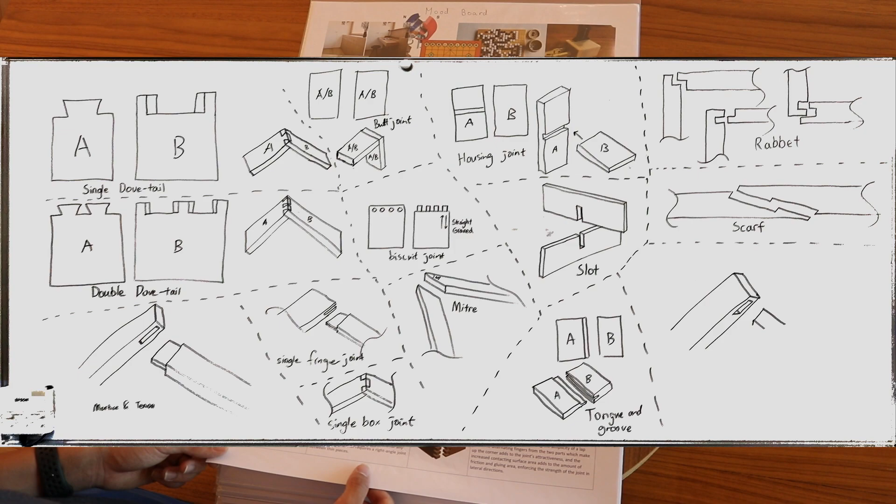With the research I made a plan, and then I made a mood board, and I started thinking about all sorts of things. I did a page of research on wood, different types of wood joints. From the start, I already had the idea of using spherical balls in mind, so I did a small test on the school's CNC machine and milled a few spherical holes on a piece of wood and tested how well the metal balls would fit.

I searched up suppliers for these metal balls, and then I did some materials research with different types of wood to see which ones would work well. I had an interview with my client, my friend.

We talked a bit, we talked about what specifications he has, and then we visited our maths classroom, since our maths teacher is actually also a Go player and has all sorts of different types of game boards, chess boards as well. I then looked at all sorts of existing products online.

There are many different types of Go boards. There are the simple ones, like the one I showed earlier, but the most professional ones are actually a full block of wood. This is a completely solid block of wood, and the grids are marked on top of it, so you can imagine how expensive this would be. But most are just the simple flat type with 2 bowls of pieces.

I then came up with a list of specifications for what the final product must satisfy. For example, I said all the joints must be hidden. It must have a 19-piece by 19-piece layout. I set limits on the cost of the materials, and I set limits on the maximum size of the final product.

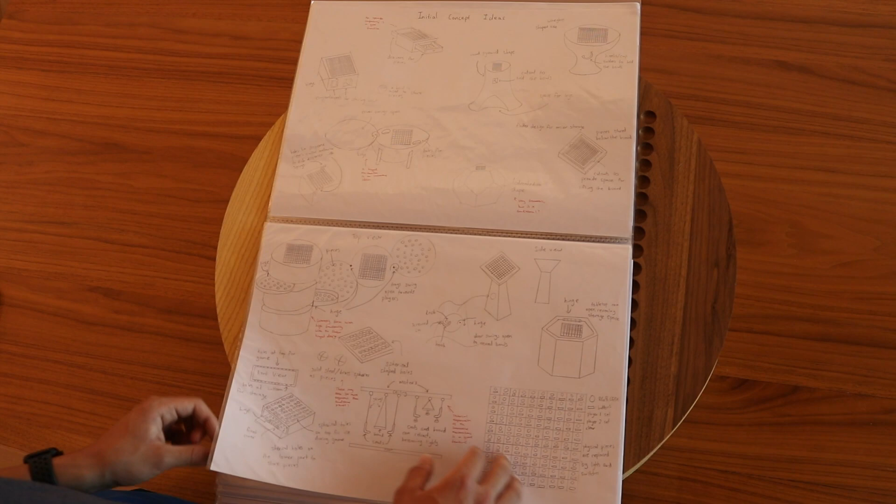And then now, with all of these specifications in mind, there's a whole process that we went through for generating different ideas. First, we just did rough sketches of all sorts of crazy ideas. There's no limit on how crazy you can be. You see, I even thought about having a board and chairs suspend from the ceiling that act as lights once they retract. I thought about a dodecahedron shape Go board, all sorts of different crazy ideas, just to start off with. And then we chose 4 out of these roughly 16 ideas and extended them further in greater detail.

Here's the first one. It's kind of traditional with a drawer and just the grid at the top. We dimensioned them in detail and did some design drawings. And I also 3D printed a very small model to see what it would look like in my hand.

Here's the next one, and it's actually the very initial idea of what evolved to become this final form. I initially thought to have different circles stacked on top of each other like this, but I could already tell that would be very unstable. And later on I do address that and develop the idea into what it is finally. I did all sorts of calculations and made a small CNC model just to test out the rough form.

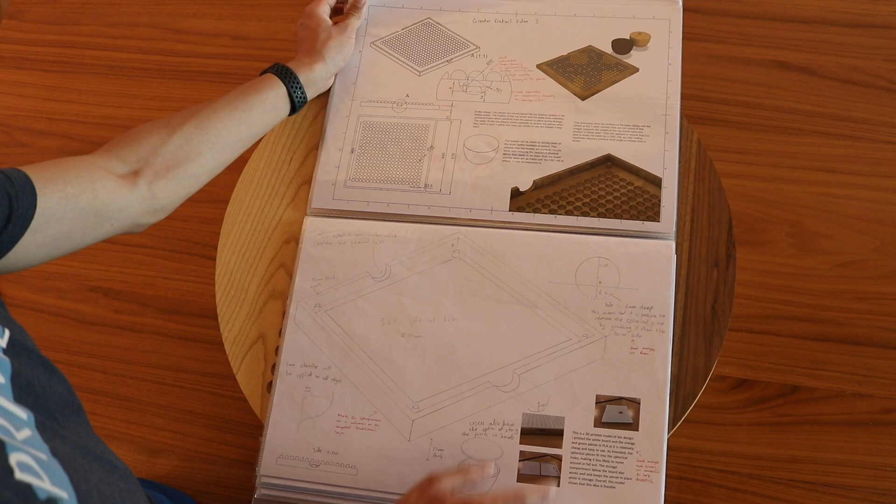My third idea was just a completely flat board. Below is the storage compartment, and a completely separate board would go on top of that to act as the playing board. And I also had pencil drawings down here.

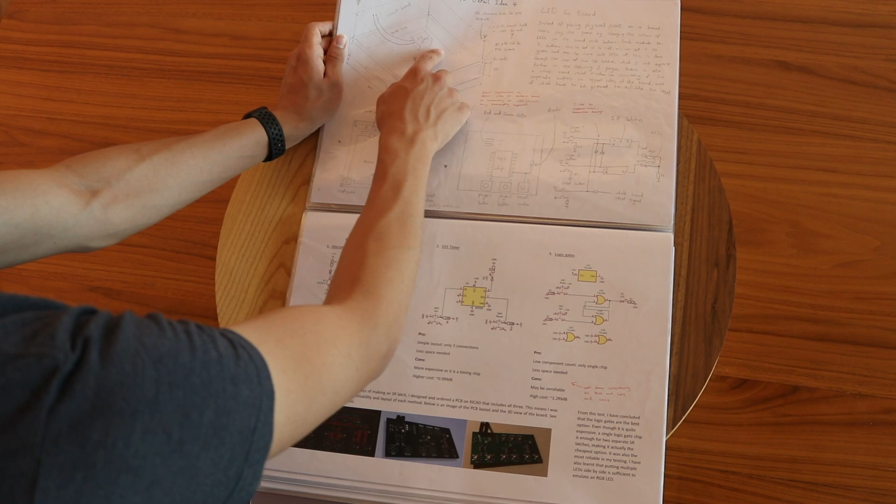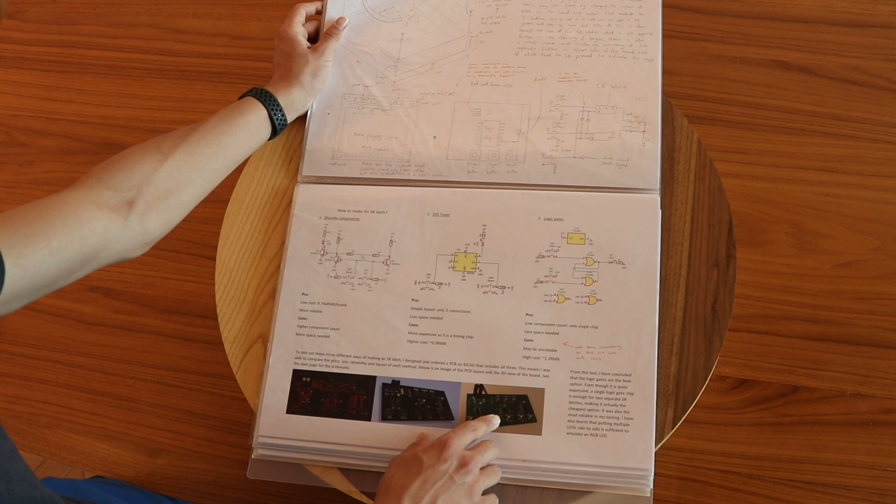And the last one is the most different. This is my electronics knowledge leaking through. This idea was that the top would be a circuit board, and instead of having physical pieces, it would be an array of LEDs. And each grid would have 2 buttons, and depending on which player is taking that grid, it would either light up as red or green. I thought about what circuits could make this possible, and I even made a physical prototype of different ways of achieving this mechanism. And here's a circuit of different ways of making an SR latch.

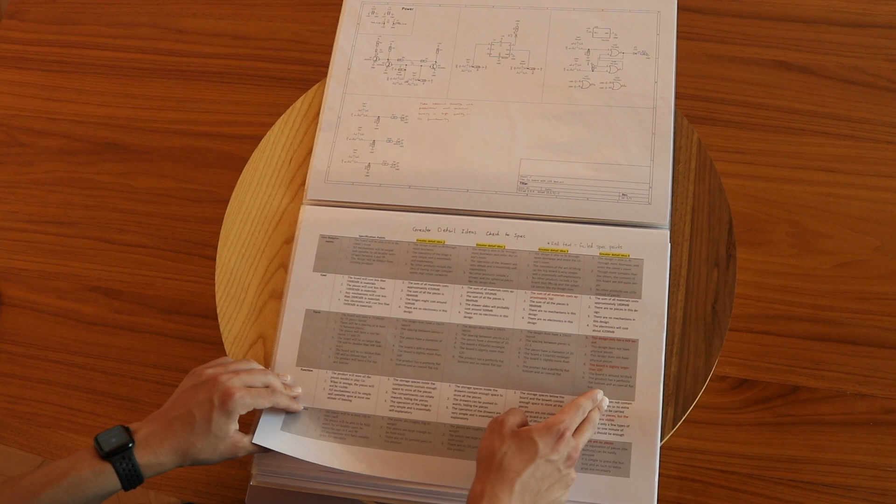Now I took the 4 greater detail ideas and compared them back to the specification from earlier. And I thought about how each one fits or doesn't fit the specification and marked the places where it doesn't fit in red text. And as you can imagine, since the 4th electronics one is so different from what I initially had in mind, it fails a lot of the specification points, and it's not something that I pursued in the end. And so I decided to go with the first 2 greater detail ideas.

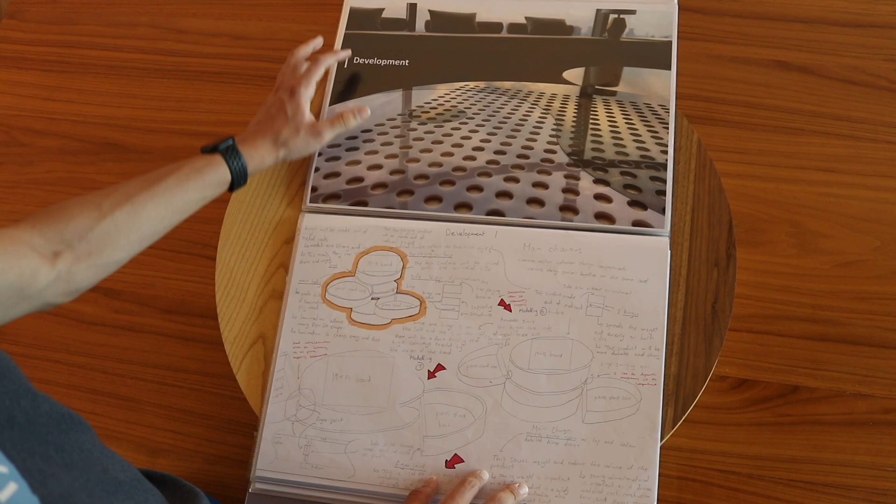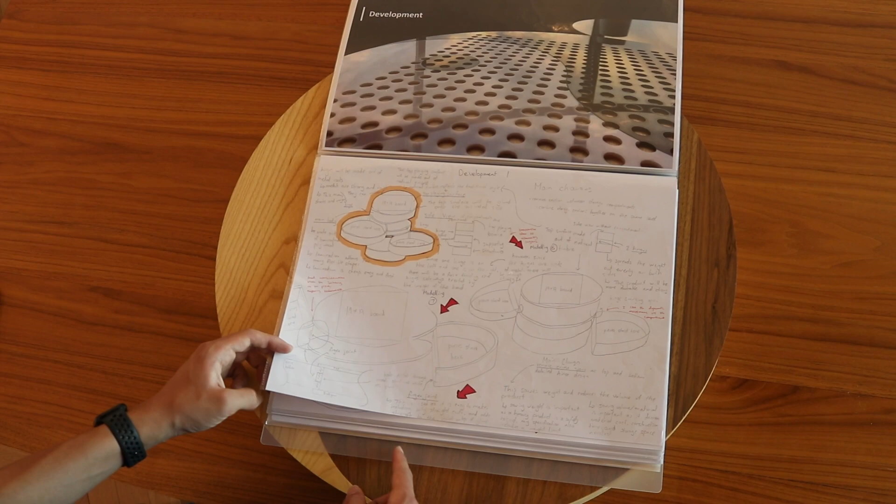And next is the process called development, where you take the idea and make a small change to it, and draw it, and then make a small change to it, and then draw it again, and making all sorts of comments during the process. So you can see how I removed the unnecessary middle section and made it semicircles to simplify. And then I removed even more waste, and I decided to change from semicircles to the Yin Yang shape, since Go is an Asian game and the Yin Yang shape is also very much related to that.

I had all sorts of ideas on how all the pieces were going to fit together and how I was going to use the rods to hold everything together. And you can see I initially had the idea of having the 2 compartments pivot through the center of the circle, and that would be pivoting through the center here. But in the final product, what I actually have is the 2 compartments pivoting out from the tail, roughly here. And you can see later here in the development process, I made that change.

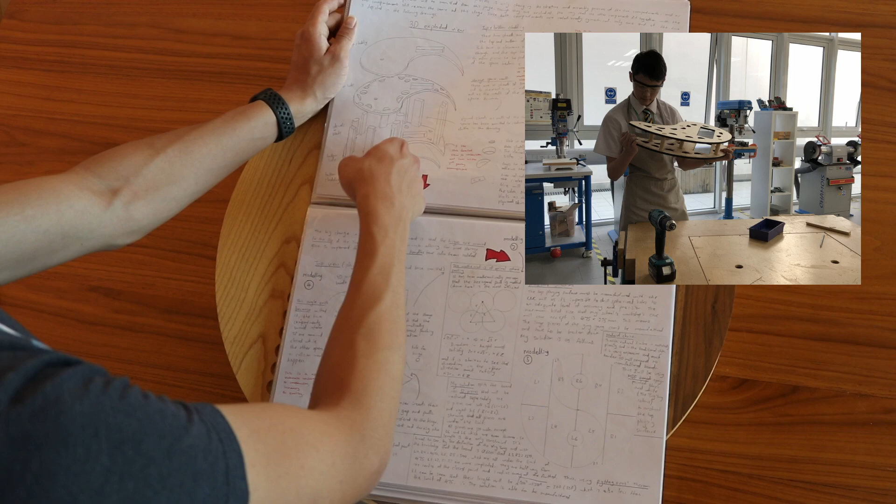Here's also one very important part. This is what the internals of the 2 storage compartments actually look like. There's a flat piece of plywood at the top, a flat piece of plywood at the bottom, and then vertical rods holding these together. So the outer skin of the storage compartment is actually a very thin veneer. You can kind of hear it's quite hollow.

I also did the calculations for how the balls would fit together in the storage compartment. I designed the 3D printed handle here. And then I described some of the physical models I made during the development process. That was the first design.

I also repeated the whole development process for the second design with the drawer, making small changes bit by bit, designing a 3D printed handle, and also describing some of the modeling used in this process. This idea wasn't the one that I ended up pursuing, and so you can probably see by now why there's so much work going into this whole DT project.

Throughout the whole process, there are a bunch of designs that you think about and describe in detail, but there's only one final product. So a large amount of the time is spent refining and narrowing down to this final product so that it can be as good as possible. Just like before, I compare the two final results of development to the original specification. And I say here how I'll settle on the first one to make at the end.

So now there's the plan for how to actually make the final product. I designed the final thing in Fusion 360 and made all sorts of views and diagrams of what it would look like. I described the whole manufacturing process, also using 3D models, and I included detailed diagrams of all the dimensions of all the shapes involved.

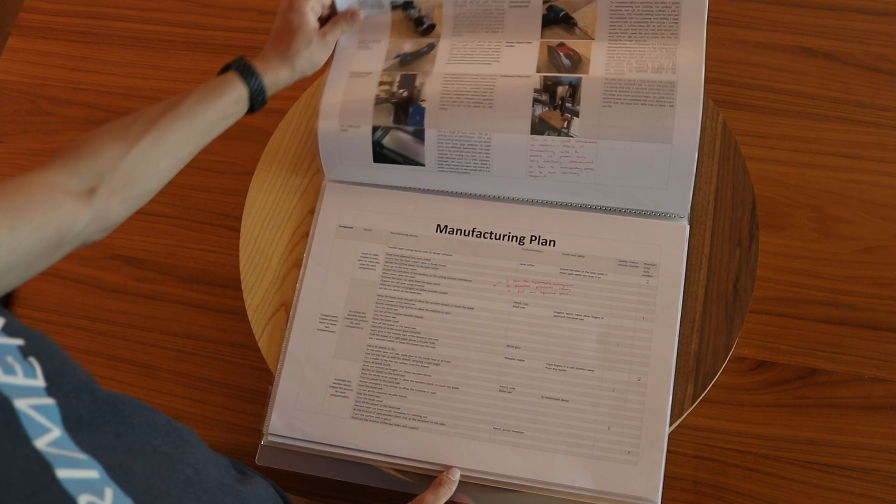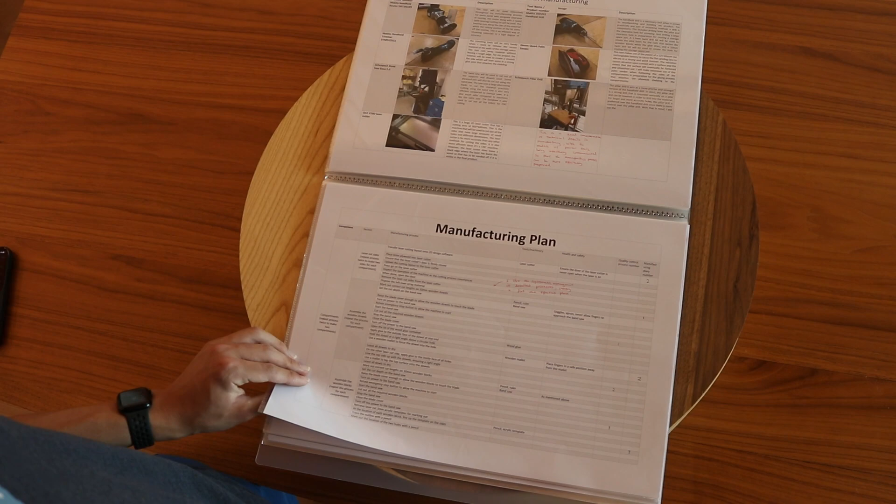I list the tools that I would use during the manufacturing process, and here is a very long list of every single individual action that I do during the act of manufacturing. And you can see it's an extremely long list. And here I have a few flowcharts for what to do if something goes wrong, and methods to check the quality. Throughout the folder there are these markings in red pen, and that was comments and suggestions made by the client when he saw my folder.

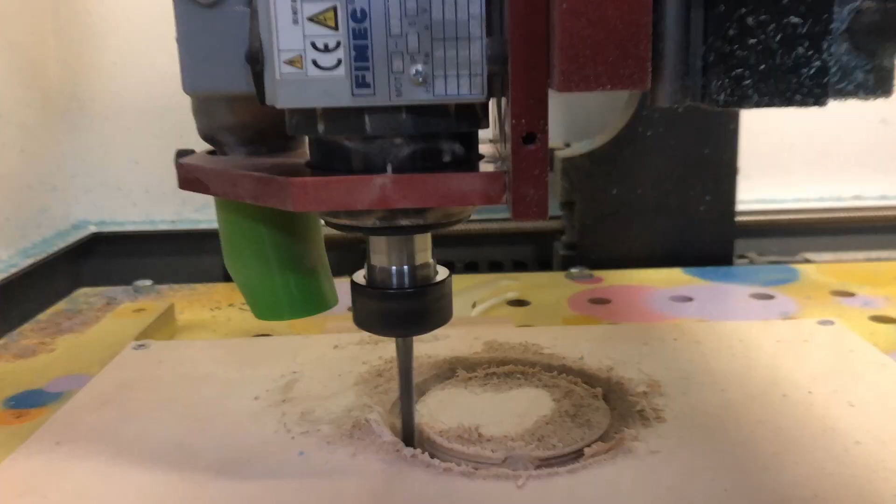The most difficult part to make out of this whole thing was the top surface, since it required finding a very flat piece of wood and CNC milling all of these circular holes into it. The school's CNC machine actually wasn't big enough to manufacture this whole thing, which is why you can see in my final design I split it up into pieces. But we eventually decided to send it off to a manufacturer who specializes in CNC. So in the final product, they are actually complete, continuous pieces.

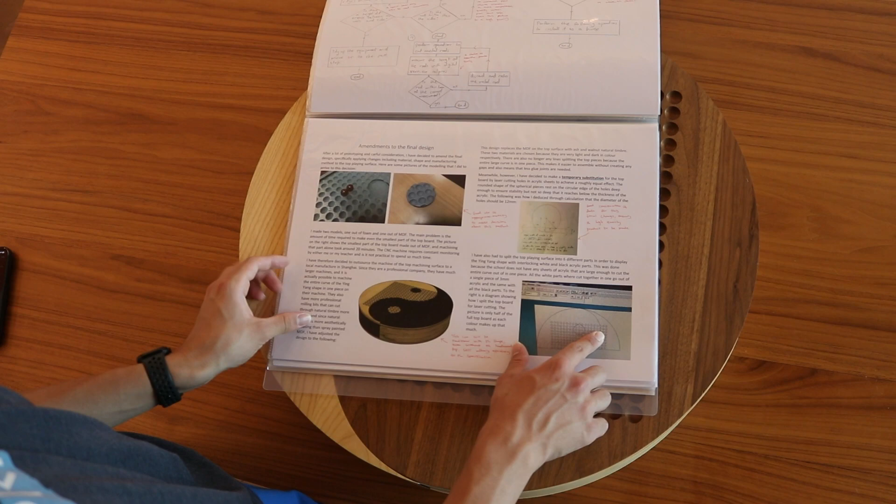But that took a lot of time, and in the meantime, what I did was design a laser cut piece of plastic to act as a placeholder before the wooden pieces could arrive. So you can see throughout the whole folder in these title pictures, those were taken when I had the acrylic placeholder on, which is why they're circular holes instead of spherical dents.

I took a bunch of pictures of me manufacturing the whole thing. You can see here the internal structure of the compartments and how I use glue and clamps to hold down the outer skin. And so here's the final assembly process, and here is the product, finally finished, still with a temporary top. But that's not it, because there's still evaluation and testing left over as the last part of the folder. I go through all sorts of different tests to make sure that the final product actually does meet the specification.

I also tested out how the spherical pieces would work and played 2 games, one with my friend, my client, and one with my mom. And it's a bit worse on video, but it's quite difficult to distinguish between the colors of the brass pieces and the steel pieces. Certainly not as easy as the black and white pieces normally. So that's a small problem, but I think it's worth it for the very nice feel of the very heavy and dense solid metal spheres.

I then officially went through all the specification points and checked if the final product met those points. Here's a page where the client gave some final feedback, and I talk about how I received the final wooden surface as opposed to the acrylic surface. And lastly, I consider some possible modifications to make the final product and the whole manufacturing process better.